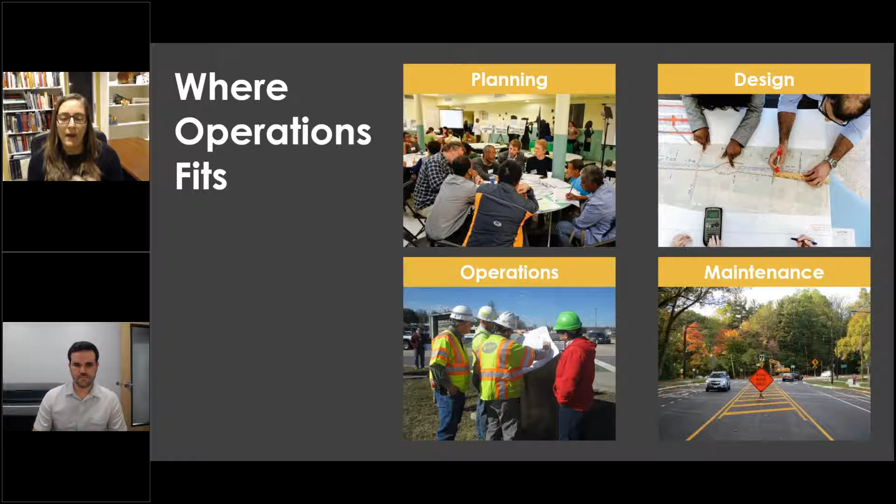So working through those five key steps in operations projects - oftentimes you'll hear in transportation the four-step process of planning, design, operations, and maintenance. But we would put forward that operations is really weaved throughout all pieces of transportation. So when working with designers, if they'd like to put in a dual left turn lane, that may impact the type of signal timing you can provide for that intersection. Design decisions have impacts on operations. The more that operations staff, design staff, maintenance staff, and planning staff talk to each other from the beginning, the better integrated that process becomes, and everyone understands how their decisions impact the work of their colleagues.

At Kittelson, our operations projects are really quite varied. So we work on access management, that would be along the corridor, looking at automated traffic signal performance measures. We talked about curb use and freeway management, also using new technologies and sometimes not so new technologies to work in the ITS world. And then signal timing and transit signal priority, as well as work zone management for work zones on the arterial or on the freeway.

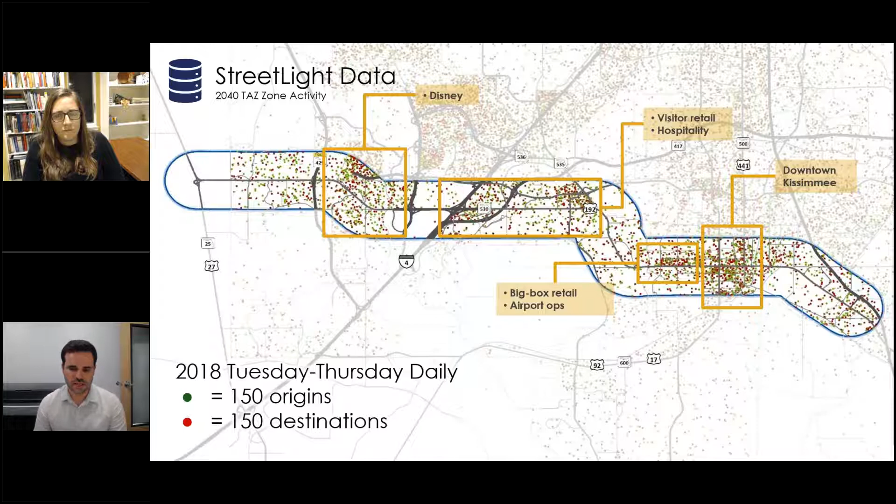And then as you go through toward the east, 192 goes right through the heart of downtown Kissimmee. So that's where you see a lot of work trips starting and ending. And there's also a small regional airport in that area. So with this data, we can really start to get a sense of those areas that we need to serve well with any kind of either transit or express lane service. Next slide.

This data set is also useful in informing the length of trips happening on the corridor. Without cell phone location data, you'd be pretty stuck at what you see here on the top half of the screen, which is just basically daily traffic volumes through different points of that segment. It's valuable data, and you can look at it over the years and see where it's growing the most, where it's growing the least, sometimes going down.

But for our specific purpose, trying to identify the potential for an express lane, we needed to know how people are using this. Are they staying on this corridor long enough where that express lane starts to make sense? What we found was that it is kind of barely so, but really only between downtown Kissimmee and the Disney area that we were pointing out in the previous slide. So we use this information to then trim our study corridor and really focus on this section with the most potential. Next slide.

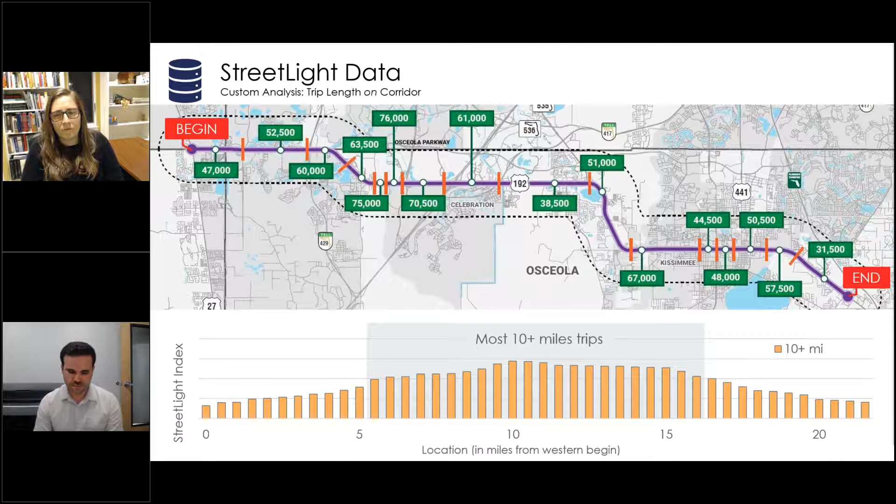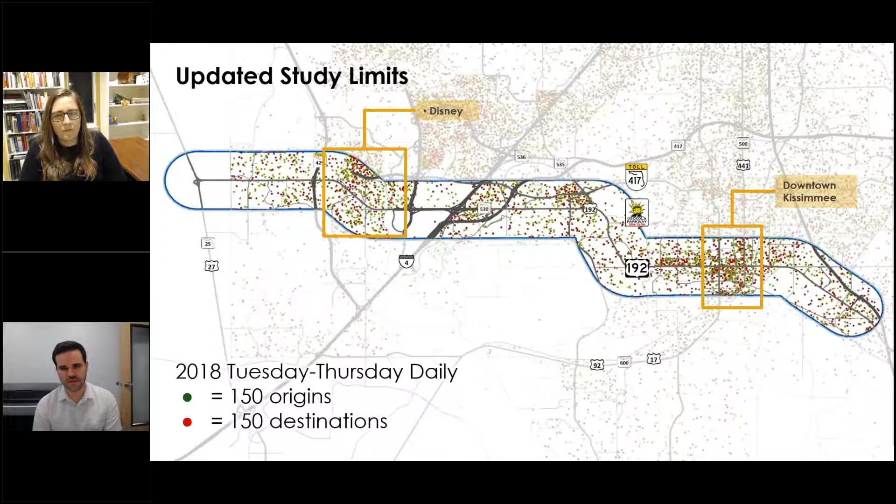So here's basically that new segment from Disney over to downtown Kissimmee. Next slide.

So we take that all in, and this is basically what we tell our project working group and our client. We're seeing a lot of scattered origin destination pairs, so not really any major predominant trip that, if you put this ingress here at A and this egress here at B, you're gonna get a bunch of people. So that wasn't the case here. It really is pretty spread out.

A lot of the trips are using 192 for short distances, hopping between some of the regional facilities, Turnpike, I-4, these are big interstates, big freeways. So there's only limited potential for those longer trips, and they really are between Disney and Kissimmee. And so we're coming out with the conclusion that your typical freeway express lane just wouldn't translate, wouldn't really serve the demand here. So we got to look at other strategies.

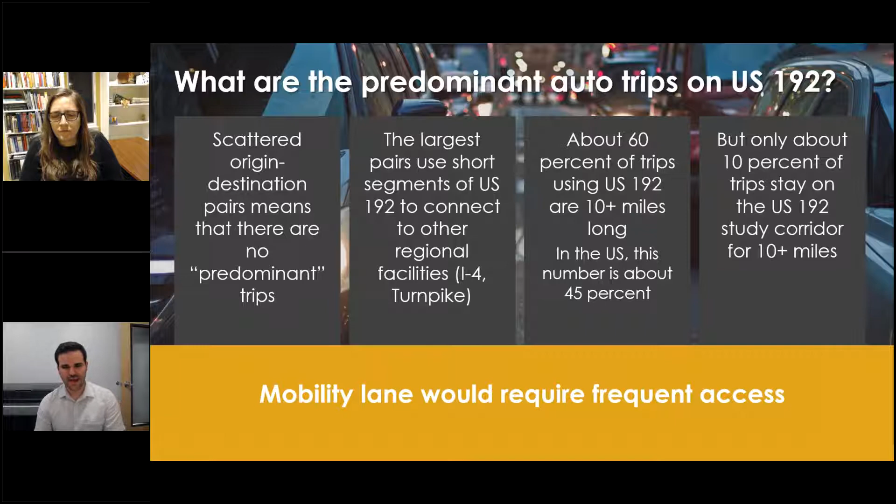Next slide. That is one of the other 5-step framework parts that Shannon presented, strategies. We made a big list here of different strategies ranging from the very low cost, short time frame tactics that would look at modifying signal controllers, signal cabinets, just signal timing in general, to very high impact, high cost strategies involving grade separation, where you're trying to basically build a bridge over intersections.

So with the help of the project working group, we really started to narrow down our options to something that's kind of in the middle, where it's not as low cost and short time frame as the signal work, but could actually get us a lot of benefits in kind of the mid-range. So we came down between queue jumps and a dedicated mobility lane. That's what we were calling those, like an arterial express lane.

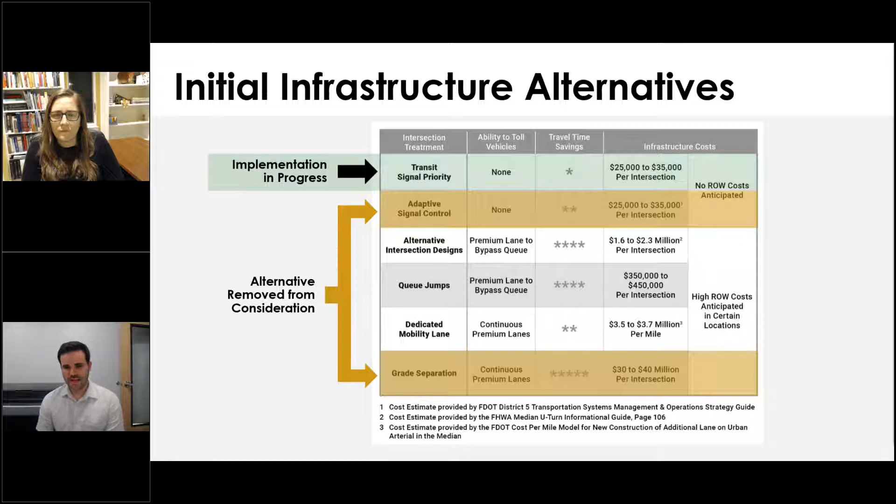But through some analysis, we realized with the queue jumps, you can get a lot of the benefits of that full continuous mobility lane without having to purchase right-of-way throughout 20 plus miles. You can just focus that at the intersections. In case you haven't seen a queue jump before, we have a picture in the next slide.

So it really is just a lane that is semi-exclusive or exclusive, generally to transit vehicles, where they can go and bypass a queue of cars waiting to go at a signal. In this specific picture, this is from NACTO, you can see that little green ball signal head on the right. So that's giving the bus that head start to use that queue jump, get around the queue.

And then after that bus is gone, the other cars will get their green indication and they can go. But then the bus has saved some pretty valuable seconds that can really add up over many intersections doing the route day in, day out. So we want to see how this could be extended to a combination of bus and tolled vehicles that could generate some of that revenue to pay for the bus operation.

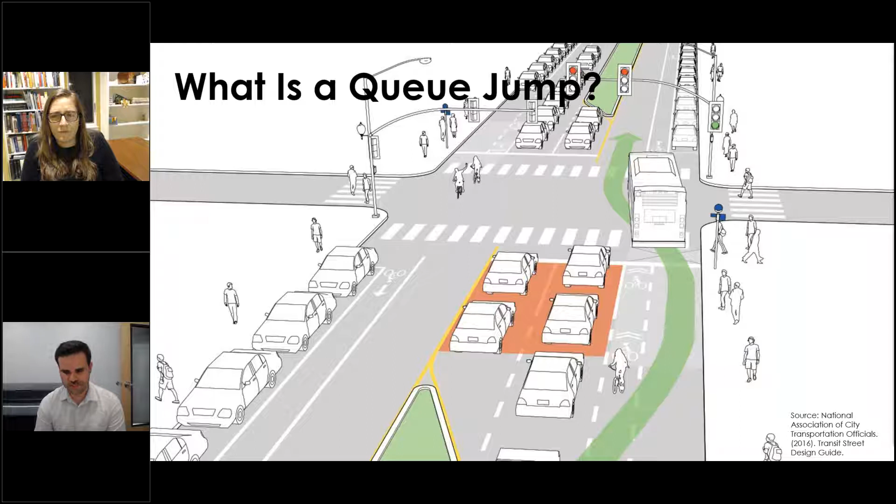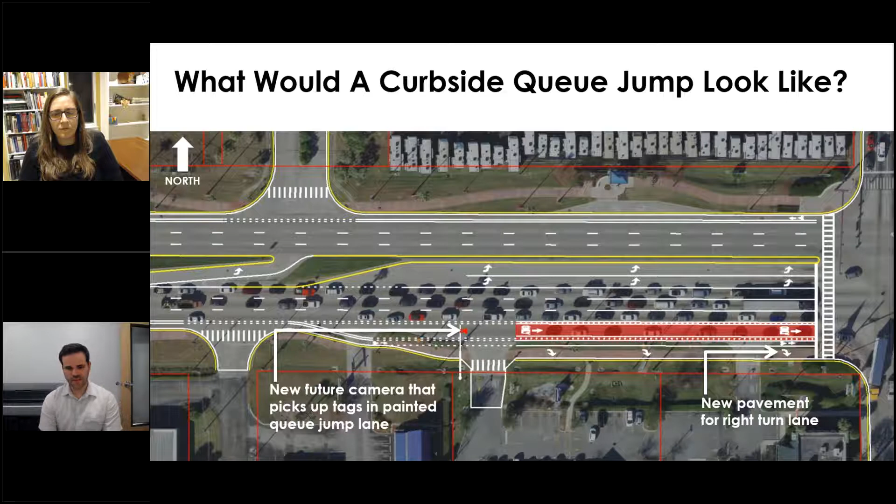And our idea is that you could have a camera, so you can see it there on the bottom left, that could pick up any non-bus user and then bill them accordingly with whatever the toll was at that time. Next slide. So one of the key questions that we had to work through our project was, okay, if you do this, how much travel time are people saving?

Because we need to know that, because that's going to inform how much they would be willing to pay for using this queue jump, and ultimately how much revenue we could generate to pay for the transit service, which is kind of that goal. So here we're really diving into the tactics part that Shannon was explaining, really figuring out for this specific treatment, how would it work within the signal timing framework that's there already.

So you can see here that we inserted that head start for that queue jump lane in the gray. The cars can use it, bypass the big queue building up on the general purpose lanes. The bus, which is that bigger pink rectangle, can also use it. And from this micro simulation, we're able to tell what the travel time savings is for those specific users versus what people on the regular lanes are experiencing.

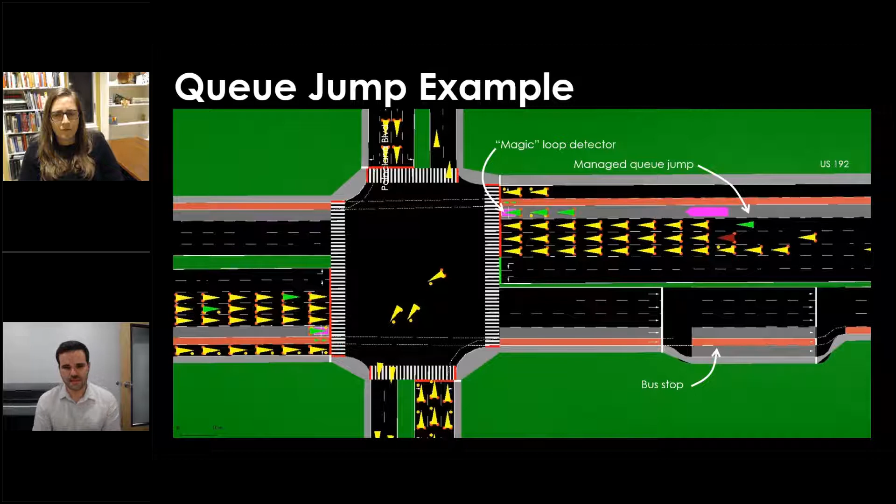Now, as we wrap up the project, our feedback to our client is that there may be a potential here, but you need technology that either hasn't been invented yet or is not widely available. So basically, tolling through just cameras is not standard. The state of the practice now is using transponders, and that couldn't quite work here. So there's some technology barriers to doing something like this at the moment, but those barriers may be coming down in the next 5 to 10 years as these technologies become more accessible and cheaper.

And so the idea would be maybe you can start with just a transit queue jump now, operated like other transit queue jumps everywhere else. But then as this technology becomes available, you can add that managed lane, managed queue jump component and start collecting some revenue.

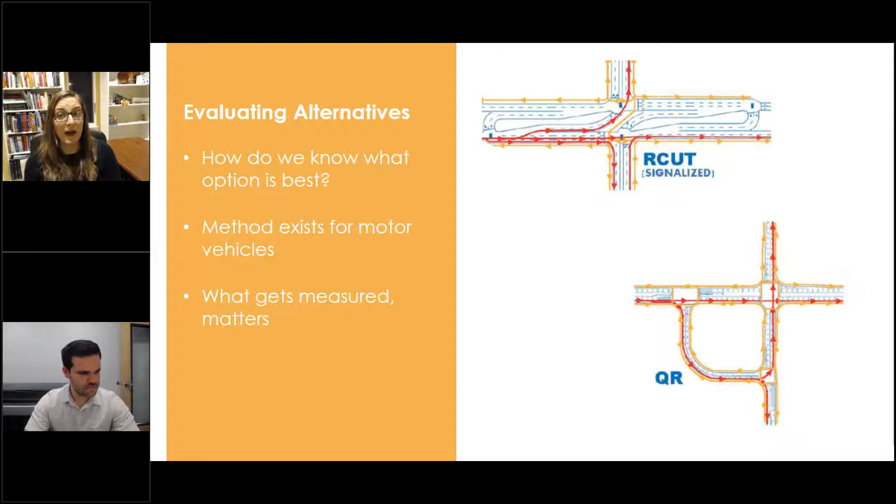So how did we go about developing this method? Well, we came up with a number of sample designs, and we created two different means of gathering data. First, we put together a web-based survey that was distributed nationally. We received over 8,000 comments where people were able to look at the sample designs and tell us what pieces they liked or did not like about certain designs.

We then also traveled to 4 cities across the country to speak to groups of 5 to 8 people for 2 to 3 hours and really dig in on what were the key elements of the designs that they really enjoyed or really did not like. What was it about those designs that made them feel uncomfortable or feel unsafe? And then often in transportation, we have to rely as well on expert knowledge. It's just cost prohibitive to build 10 sample intersections. And so we have to use a number of different methods.

One of those is expert knowledge, to understand what we know about the data that tells us what's unsafe about a specific element of an intersection, for example. And so from there, we developed what we've lovingly called a game of 20 questions.

This is the methodology. It has some questions that we ask in the analysis, some address operations, some are focused specifically on safety, comfort, or quality of service, and then there are elements that focus more on design. So it's that blend of where operations and design meet.

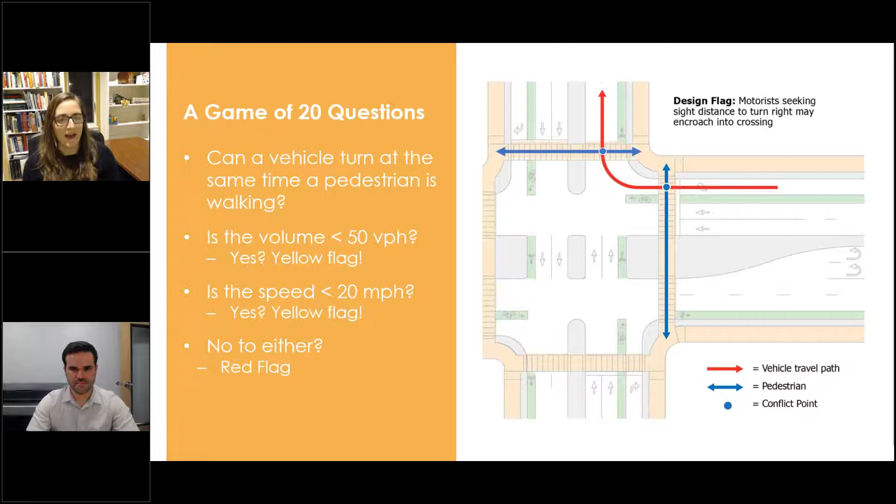If we say no to either one, so if volume is higher than 50 vehicles per hour or speed is higher than 20 miles per hour, then it's a red flag. Red flags indicate a more severe concern for this analysis. You would complete this design flag questioning for each pedestrian movement, each bicycle movement, and then move on to the next question in our game of 20 questions.

This methodology is not perfect, because there's no perfect intersection for all of our vehicles, pedestrians, bicyclists, transit, and all users—sometimes you're just in conflict. But we think this methodology is really helpful for designers and planners as they think through their alternatives, to identify areas of concern and allow them to consider pedestrians and bicycles in their alternatives assessment.